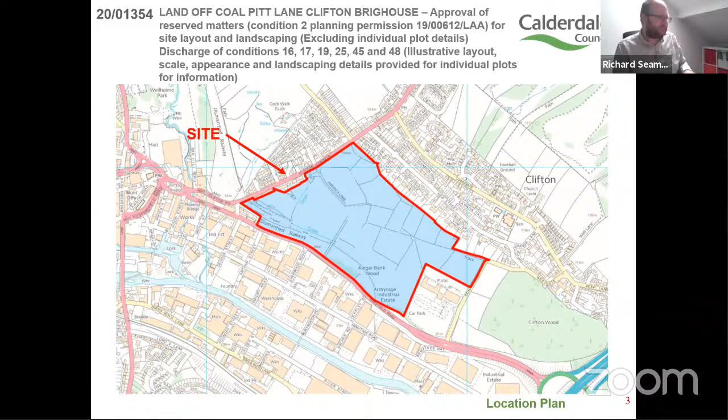This shows the location of the application site between the Armytage Road Industrial Estate and Clifton, to the north of the A644 - an aerial photograph, some years old now, but nevertheless useful in showing the context.

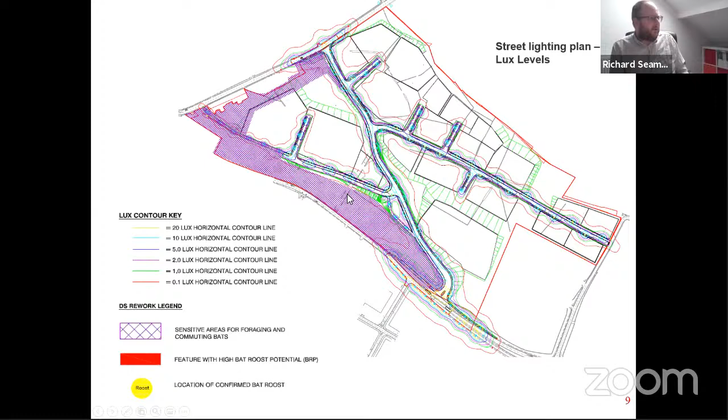You can see how quickly the light contours reduce from 20 lux to 0.1 lux, being this red line. In addition, the sensitive area, which is the woodland that runs along Wakefield Road, is identified. That's sensitive for foraging and commuting bats, who would be sensitive to artificial light. You can't, at this scale, see the location of the confirmed bat roosts, unfortunately.

That obviously ensures that you get a sort of diminishing height as you climb the slope, and that the relationship to the residential properties in Clifton is acceptable.

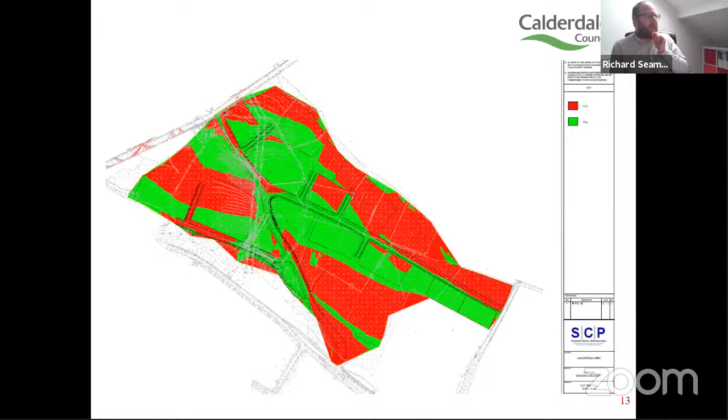This is an extract that I've included because it shows the section through plot 7, which is the most sensitive in terms of relationship to adjacent residential properties, because it's... I will point it out on the plan. In fact, I've got an extract actually which will follow.

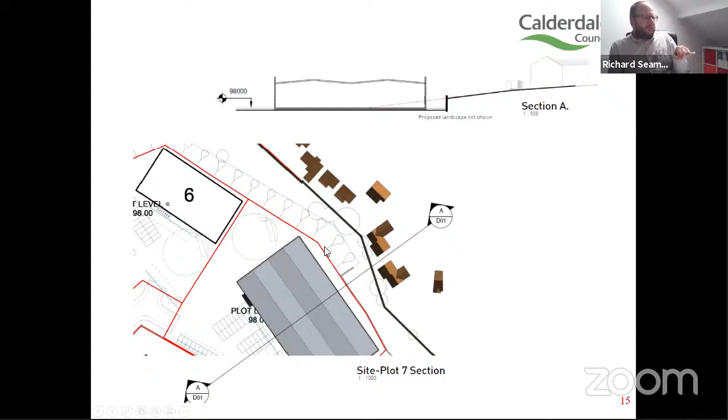If I move on to the next plan, this again is a similar drawing, but it shows the indicative siting of the units at plots 6 and 7. As I say, I emphasize indicative, with the measurements between the existing houses and the indicative positions.

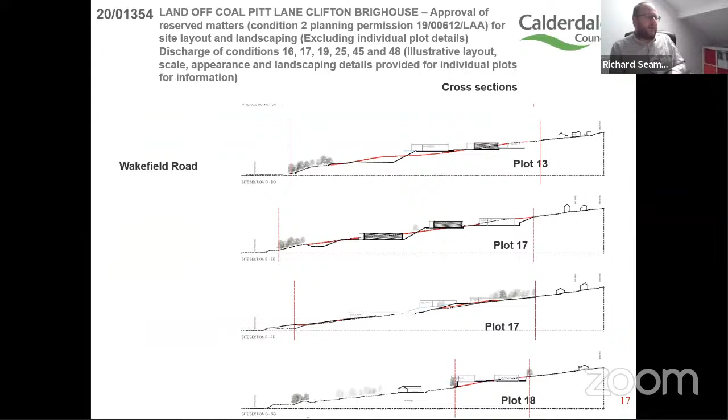Again, further sections, and I've just included this as an extract from the spot heights. So this is one of the sheets showing site levels, in the plot 6, plot 7 area.

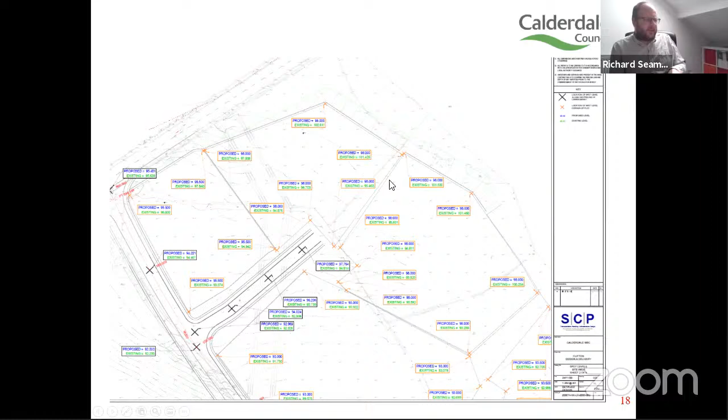You can see that you've got a typical proposed level of 98 metres and an existing of about 101.5, or in this corner, proposed 98, existing just less than 101. So it's cutting into this top embankment of the site.

Moving on to the other side of the site, Coal Pit Lane, and a view along Wakefield Road, looking effectively just past the point where the dual carriageway becomes single carriageway as you come away from the Junction 25 roundabout. You can just see the Holiday Inn behind the trees, and again a sort of very approximate indication of where the access would be located, as indicated with the cursor.

So the final slide reiterates the representations, key issues. The recommendation is one of deemed approval, reserve matters. That reflects the fact that it's a local authority application, hence we describe it as deemed approval.

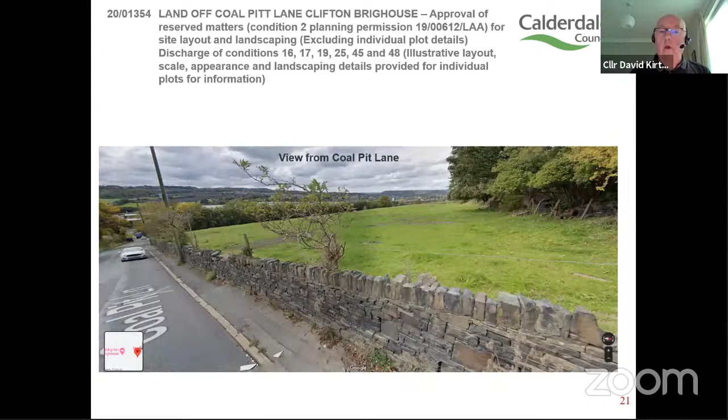Yeah, just if you could just go back to indicate where two things initially, where the public open space is proposed and where the location of the on-site substation.

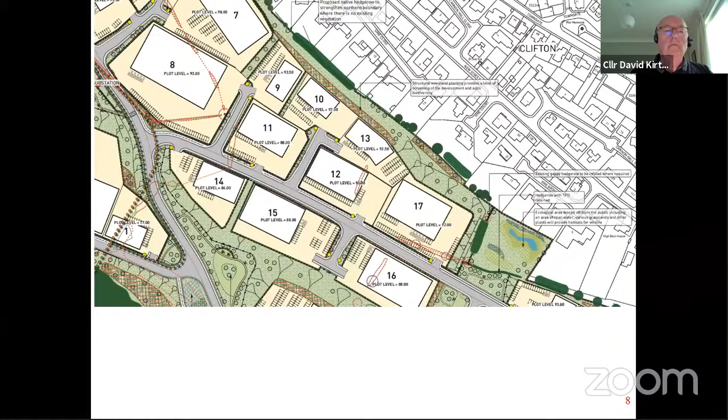The public open space is that area there, so this is the access off the A644. It's that area there, and I'm just trying to put it into context with the plan - sorry, it's difficult when you're comparing the two plans. It's in that location, I believe.

And how is that accessible to the public then, Richard? I think the principal users are likely to be people working within the business park. It will be accessible to anybody who happens to go into the site, but I imagine it's going to be the sort of area where employees will eat their lunch and socialise.

The substation - okay, bear with me, I'm struggling to see it given the scale, I'll need to check, sorry it's pixelated a bit on my screen. I think I can see it, but I can't get the resolution. I'll need to come back on that one.

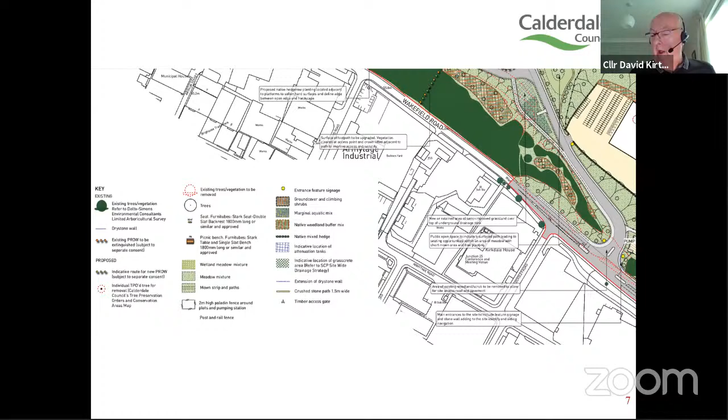Councillor Kirton. Yeah, thank you, Chair, just another question, Richard. You've spoken about plots 6 and 7, and I appreciate they're only indicative at this stage, and the fact that they will sit lower down by being cut into the banking there. But they do look fairly close to existing residential properties, and my concern is with possible noise issues from these units. If you could make a comment on that, please.

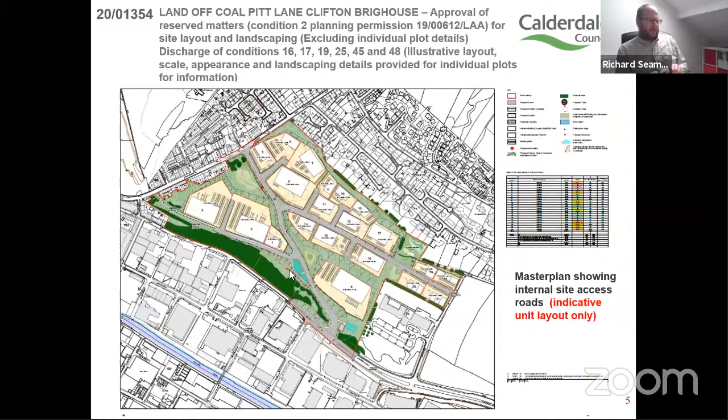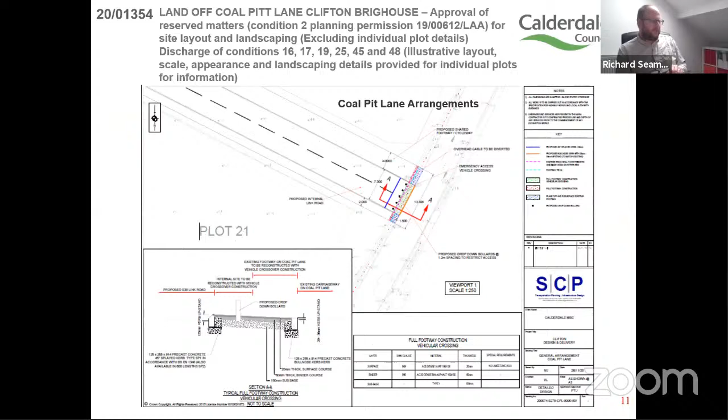Well, bear with me - the separation is actually, there's a plan which shows the separation. Bear with me. Yes, the separation is in the region of, at that nearest point, 24 meters. So whilst it looks quite close on the plan, it's actually a reasonable separation.

You've then got obviously the drop in levels, yes, the design and specification of the buildings, and conditions that control sound insulation and noise attenuation and the like. So it's not anticipated that you would get any issues of noise disamenity given that relationship.

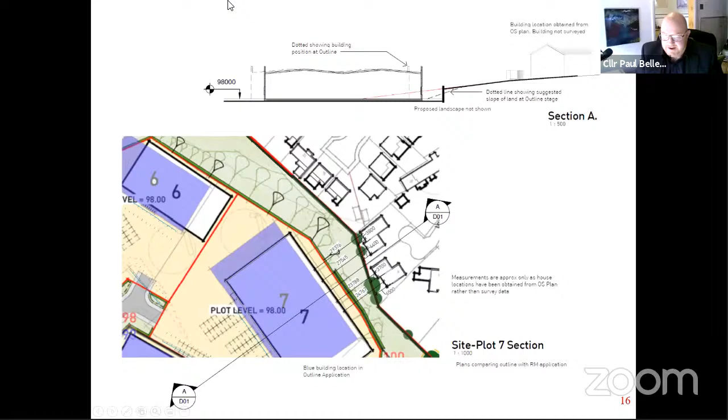Okay, thank you, Chair. I'm struggling to see all members because I've only got 6. Should I close the presentation? Sorry, yeah please, thank you Richard. Any more members, any more questions to our officers on that presentation? No, okay, right, we'll move on.

We actually have an objector who wishes to speak on this application - we have a Jason Shoesmith. Jason, can you hear us? Okay, yes I can, thank you Chair. Jason, you have 5 minutes to put forward your case, your comments.

That will be timed. At the end of your 5 minutes, members will have the opportunity to ask you any questions. Gurpreet, are you taking time? Yeah. Jason, it's over to you, you have 5 minutes. Yeah, thank you very much.

Firstly, as a resident of Clifton and someone who works within the construction industry, I'm personally not against appropriate development. I do, however, find the proposals for the proposed industrial estate, only meters from the back gardens of residential properties, to be wholly inappropriate for this location. That said, should the scheme ever come to fruition, I make the following points and ask the committee to please consider them carefully when deciding the matters covered by this reserved matters application.

Firstly, buildings 6, 7, 8, 11, 12 and 17, all of which sit within close proximity to the residential properties, should be reclassified as B1, B1A and B1B in order to protect the residential amenity of the neighbouring properties. Locating light and general industrial buildings in such close proximity to residential property is completely unacceptable.

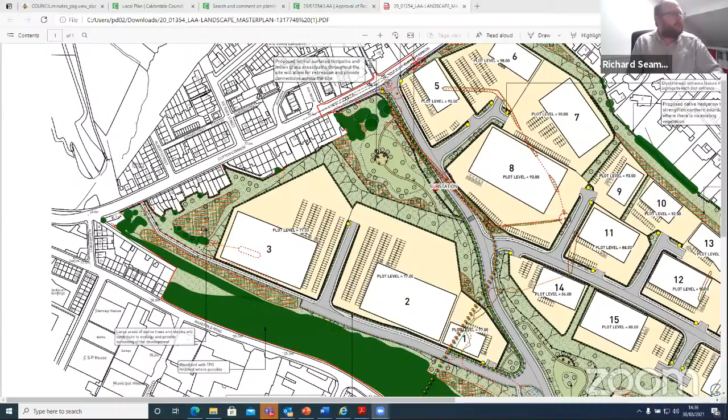Thank you for that, Richard. Quite happy with that then. Yeah, thank you, Richard.

Councillor Blackburn, you have 5 minutes to speak as well. Thank you, Chair, and thank you for allowing me the opportunity to speak on behalf of local residents. There's been a large number of objections on this particular application. I must admit, I found it quite confusing because I understand outline planning permission was granted in 2019, but what does reserved matters actually mean to the general layperson?

I think the communication could have been a little bit more effective to outline what these things were. Equally, the late uploading of some documents is something I have issues with. I've objected on behalf of the residents previously. I have issues in terms of the viability, as no funding is now available from the West Yorkshire Combined Authority. I appreciate that this is not a planning consideration, but it's something we need to address.

If we're looking at the details of this, and this is the key element, we're looking at traffic issues. One of the main issues, which I did raise at the outline planning permission and still think is very relevant, is we need a controlled junction on Clifton Common. It is an extremely busy junction, and it's going to get even busier with the amount of additional lorries.

Equally, on the actual site itself, what you've not proposed, I don't think - you might correct me wrong - is yellow lines, and is there going to be adequate parking within the compounds of the actual units? The other element, of course, is the Holiday Inn, the visitors coming to the area because of the beauty of the area - what noise levels are they going to experience?

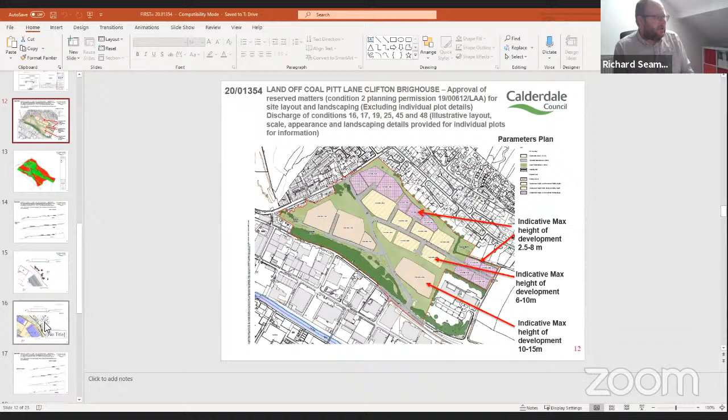The indicative details, as I understand it, the sections show the upper end of that range, which would be 8. But ultimately that's a matter for the reserve matters application. It's not an issue that the current application could be refused on, because those ranges have been set, and the reserve matters application will then consider where within that range is the appropriate point to set the height.

So can I ask another question? This is just illustrative, the position of the building, the height of the building on the section that I'm showing. Would each individual plot have to go through planning?

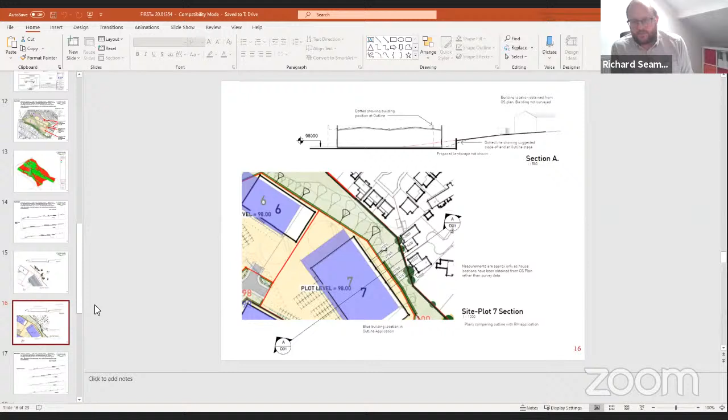Yes. So as their uses would change, they'd need to apply for a reserved matters submission, and they might come forward individually, or in groups. What will often happen is a reserved matters application will come forward to suit a particular occupier, or have different needs. But yes, every individual plot will be subject to either an individual reserved matters application, or will form part of a bigger reserved matters application.

So we're only actually agreeing on the sites at the moment, not any of the buildings on the sites, just the pads. Is there any more? Essentially, yes. Members are considering the structure of the development, the skeleton of the development - the roads, the landscaping, and these platforms.

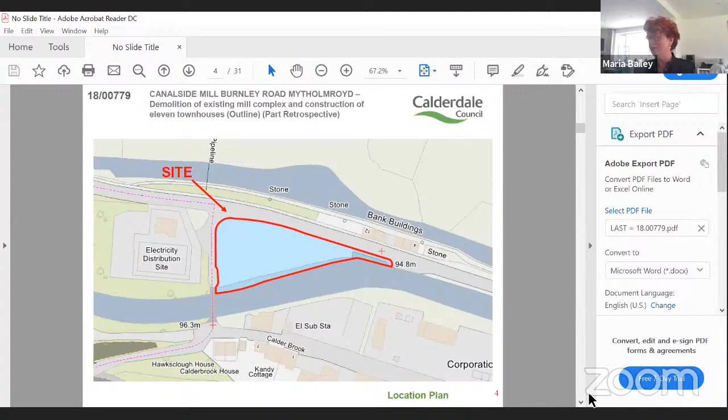If I could then just talk you through the plans and also the photographs of the site. This is the site, as you see it's adjacent to the main road and also adjacent to the river at the south.

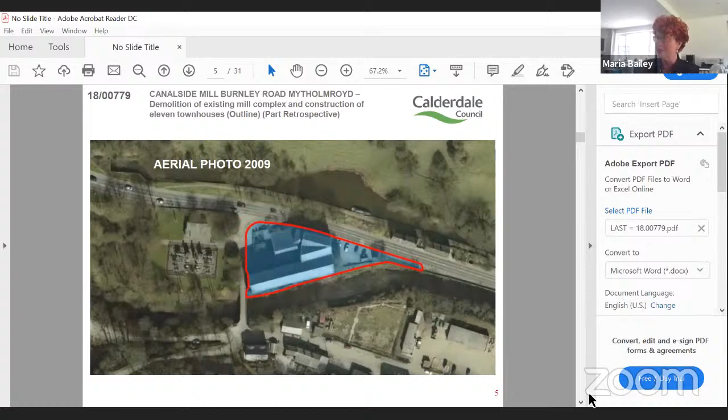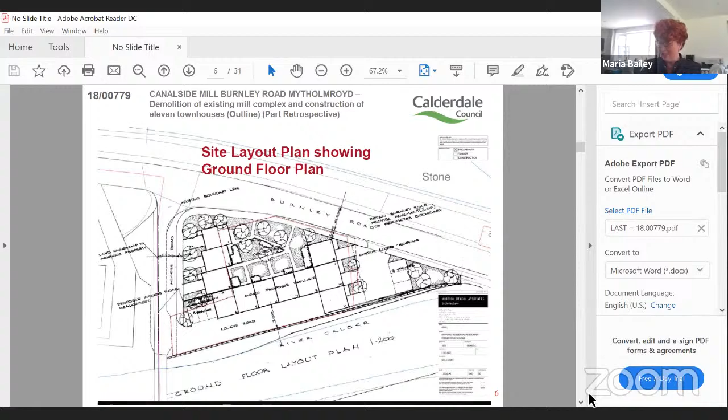This is the site layout plan, which shows the ground floor layout as well. I've got a number of floor layout plans and elevations, but when we get to the visualization, hopefully members will be able to see the development in its context a little better, because it's often difficult with these two-dimensional plans.

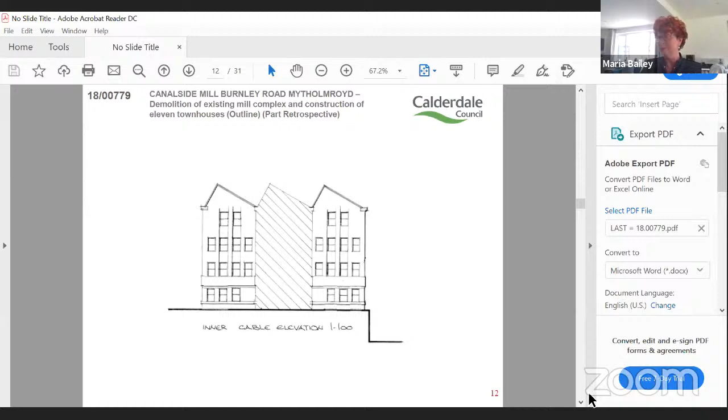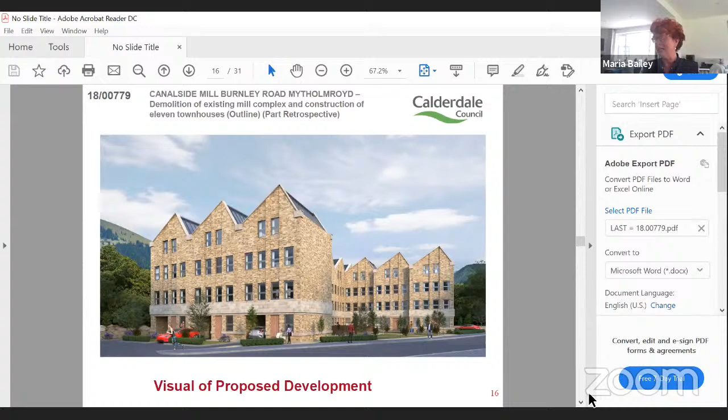And this is the visualization, which hopefully will allow you to see the development in its context a little better. This is the view of the vacant site looking east from the access onto Burnley Road.

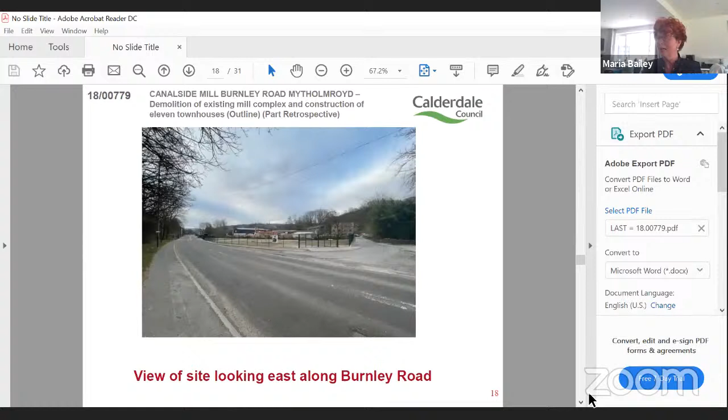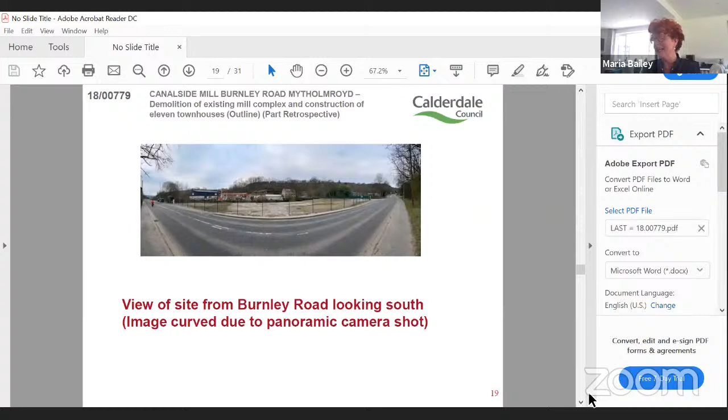View of the site looking east along Burnley Road. And this is the view of the site again from Burnley Road looking south, a panoramic camera shot for you there.

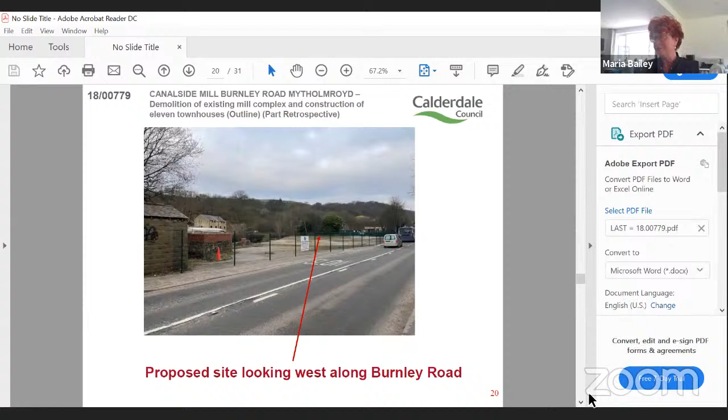This is the proposed site looking west along Burnley Road. And this is the view of the site looking north from the River Calder, and a wider shot again there for you.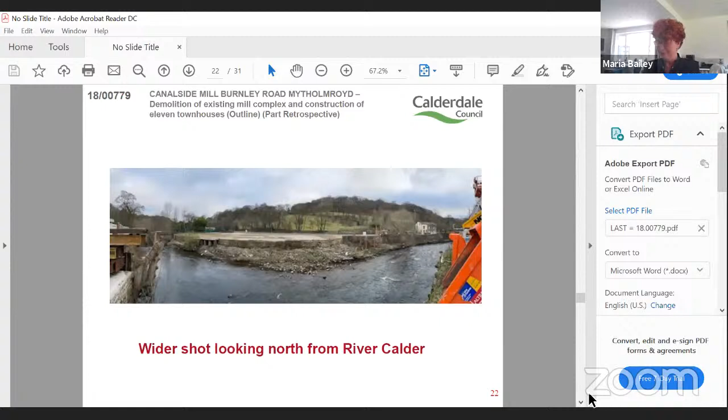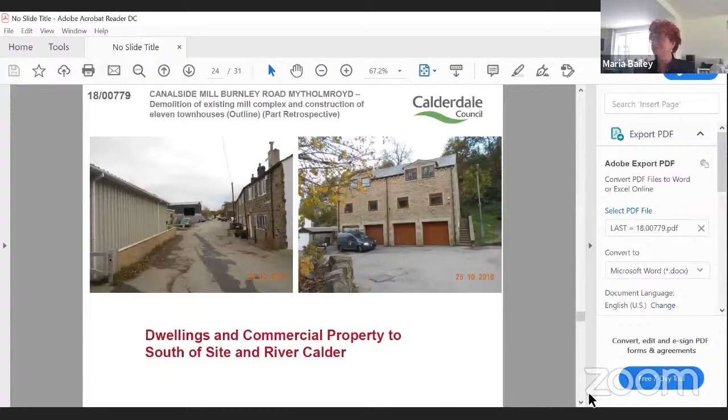This is the site, and this is in the context of bank buildings on Burnley Road. And these are the dwellings and commercial properties that are to the south of the site and the River Calder.

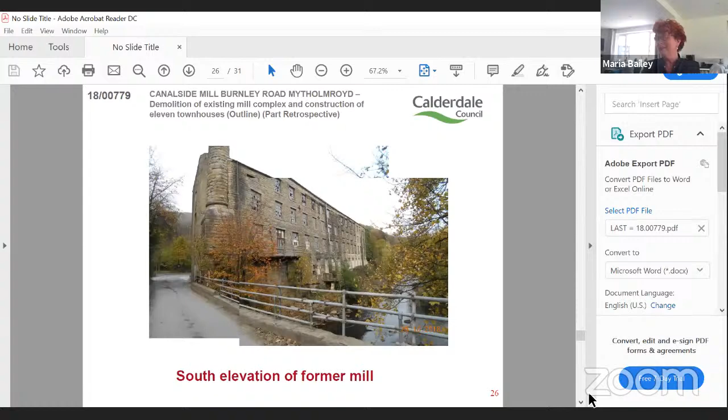This is the view from Burnley Road of the former Canalside Mill. South elevation of the former mill. And the eastern elevation of the former mill.

You will see in a lot of the representations there was concern raised about the loss of the building, but that was something that had to take place due to the fire and the fact that the building was no longer safe.

And that's the images of the western part of the north elevation of the former mill. So that's the electricity distribution site, which is to the west and access onto Burnley Road.